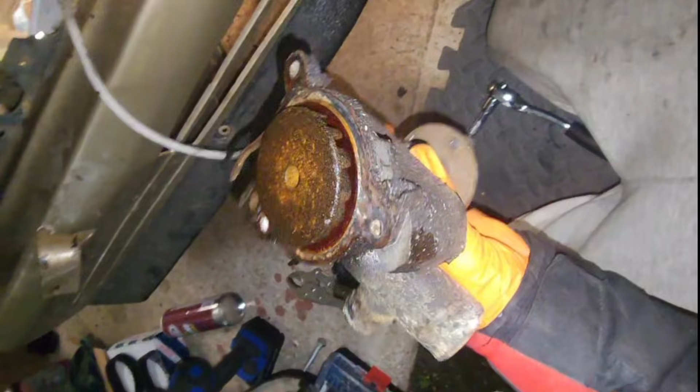That's why we should never pour water into our coolant tank. So this is our water pump, and this is the outer cylinder walls. This is where the coolant would flow through.

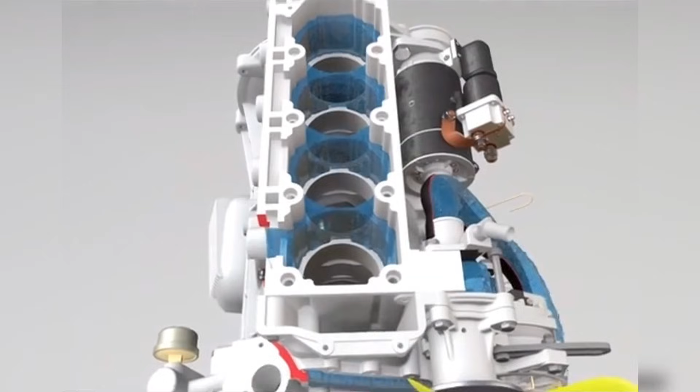Just look at it. Let me explain what I showed you in a bit more detail. So we're going to show the coolant flow journey. So we pour coolant into our radiator. It's going to make it up. This is our water pump. Then this is going to fill the cylinder cooling jacket. So you've coolant going all around the outer cylinders to keep it cool. And this is where we're seeing a lot of rust water and contamination, as well as the water pump.

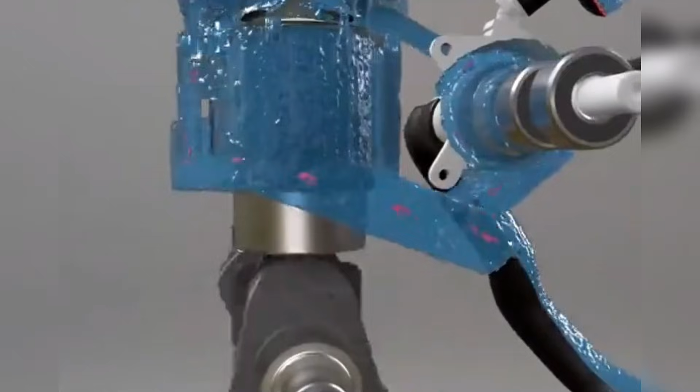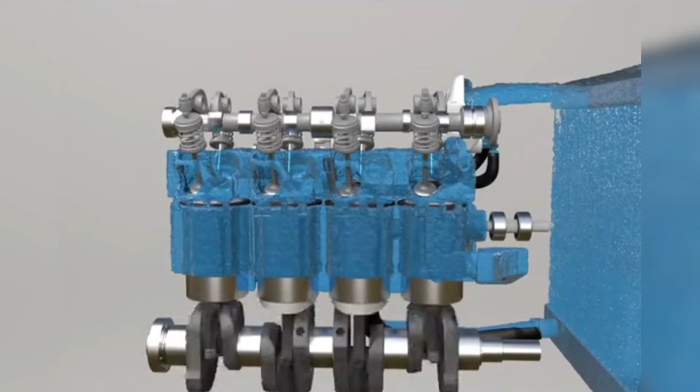So using tap water instead of proper coolant in a car's coolant system causes so many problems, like rust and corrosion. So tap water has minerals in it. The minerals rust the inside of the engine, radiator, water pump and heater core. Rust flakes can clog up passages and reduce cooling. Overheating: coolant has special additives that help it absorb heat better and prevent boiling. Plain water boils sooner, especially in hot weather, which can lead to overheating.

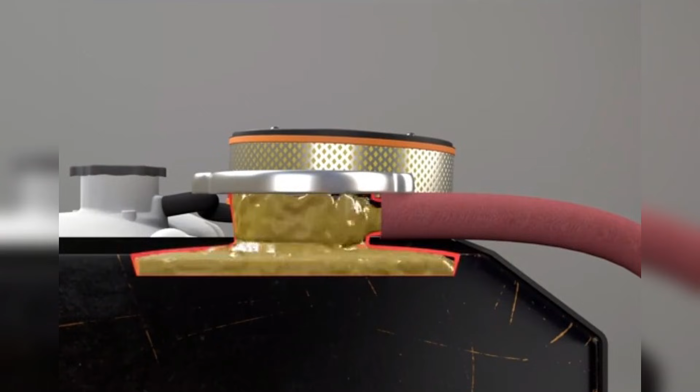Freezing damage: water freezes at 0 degrees Celsius, so coolant lowers that freezing point by a lot. If water freezes in the engine during winter, it can crack the engine block or radiator. Limescale buildup: tap water leaves behind limescale, like what you see in your kettle or shower head. The buildup reduces flow inside the coolant system and makes the coolant less effective.

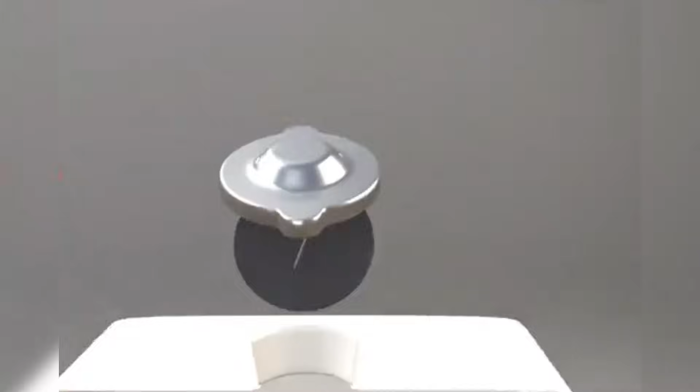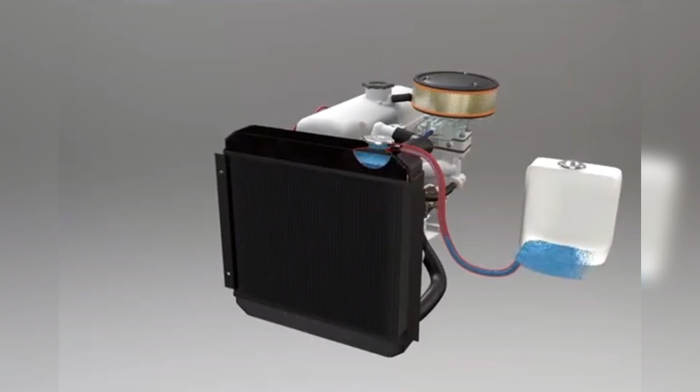It also shortens the lifespan of parts like the water pump, thermostat and radiator, which will wear out faster when coolant isn't used because they rely on the coolant's lubrication and anti-corrosive additives. So let's start from the top and get this sorted. So we're gonna do the timing belt, camshaft seals and water pump and flush all that bad stuff out of it in this video. So here we're looking at the front of the engine.

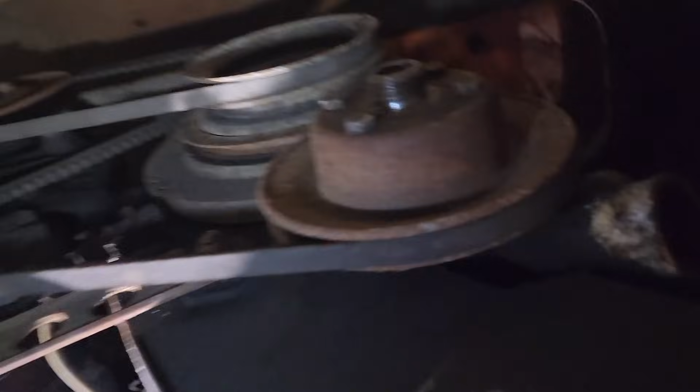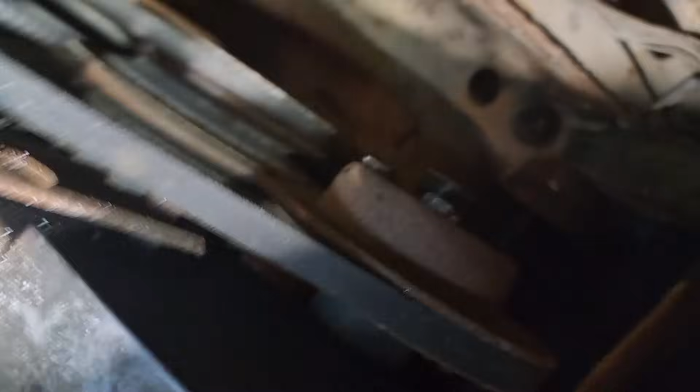We can see that's the crank bolt, which is going to be the toughest bolt to remove. I think it's 350 Newton meters. We have two auxiliary belts running our power steering and running our alternator. So we can see there we need to loosen the tensioner bracket on the alternator. So that will give us a bit of slack to pop off these belts. Our clutch fan was attached to our water pump pulley, which we removed in the last video. So once we get those belts and pulleys off, we can remove the timing belt covers, which will reveal the timing belt then.

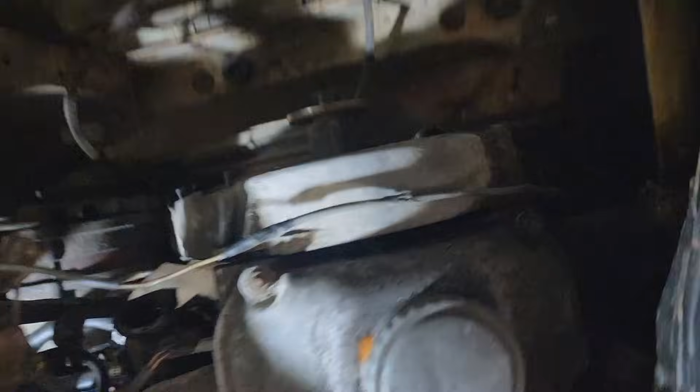Okay, so now we've removed the water pump pulley, which was just 4 bolts on the front. We're unbolting the timing belt cover here. There was a bolt here as well for it. This is our water pump that you can see here, which we just removed the pulley from. So this bracket here is the tensioner for our alternator that we just pulled off. This is a look at the front of the engine now with the timing covers off.

So you'll have timing marks on the cam sprocket up here. It's going to be hard to see, but there's a little arrow there going to a line that's notched into the block. Trying to focus on it, and here we go. I don't know if you can see that, but I'll circle it so you can get a better picture of it. And there should be marks for the crankshaft then as well that you can see here. I'll circle it as well just to make it more obvious, but you want to rotate the engine to top dead center on cylinder 1 before trying to remove the timing belt.

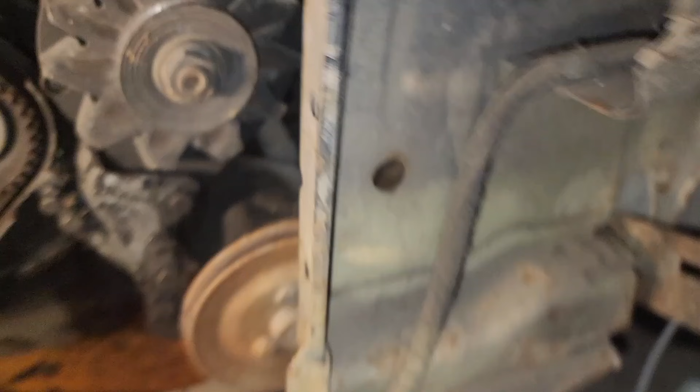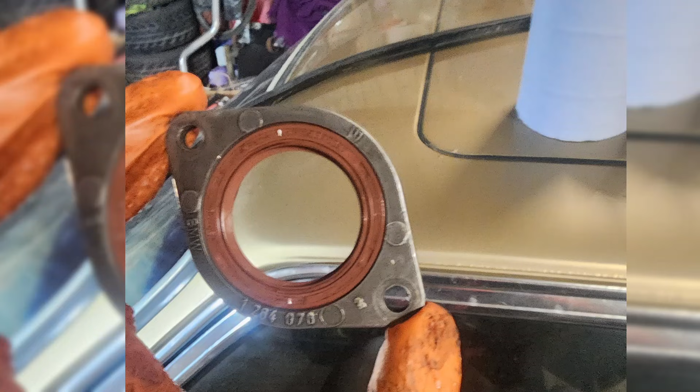Okay, so we removed the timing belt tensioner and cam sprocket, and if you're wondering why my engine is covered in oil at the front, it's because this camshaft seal is leaking, so we're going to be replacing that as well with a brand new one. So here's our new camshaft seal. It's another view of it. This is the old camshaft seal removed, so this is us going to be putting the new one on.

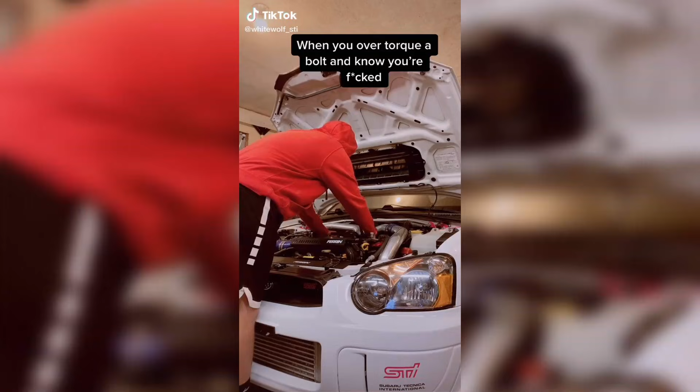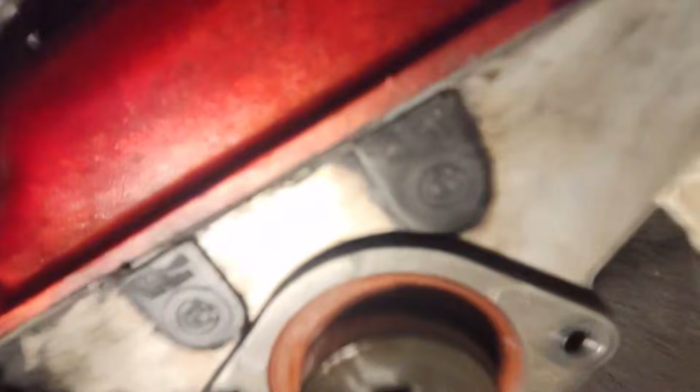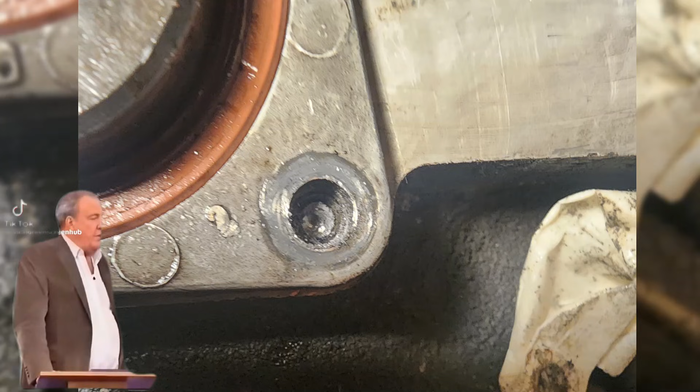Now all we have to do is torque it to a safe spec. Should be easy, should be straightforward. What could go wrong, right? I turned an hour job into an all-night job. So here's the snapped bolt in the cylinder head. How, in the name of all that's holy, did you do that? Yeah, so this is the snapped bolt, just over-torqued it, so we're going to have to try get it out and we'll get a new bolt to go into it. It's going to be a long night.

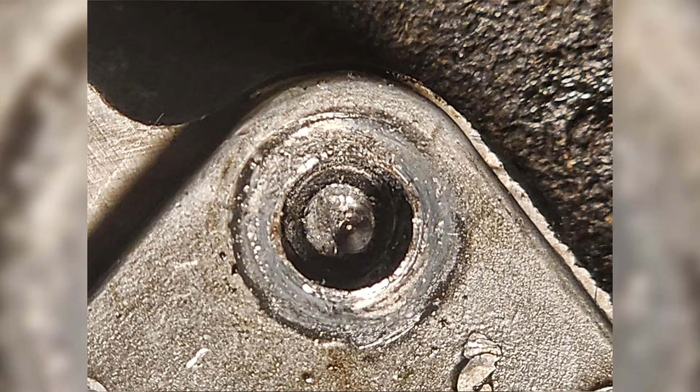So what I'm going to try to do now is drill it out, leave the head on the block, leave the block in the car. Don't want to be taking that out. Let's hope we can get it out without damaging threads.

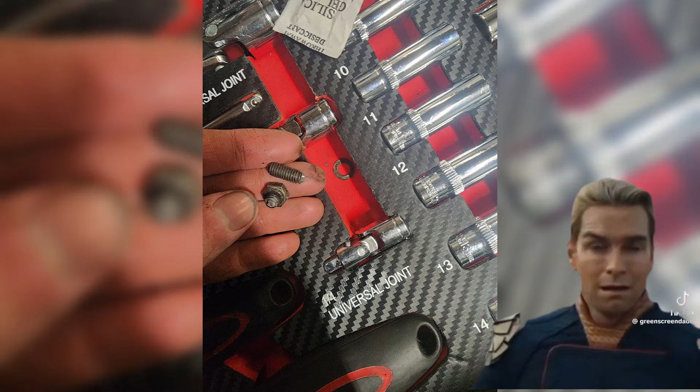So we got it out, new bolt in, torqued to spec. So now let's get back to putting the timing belt back together. This is the timing belt tensioner pin. It's looking very worn, but it does clean up very well. However, we still just bought a new one anyway.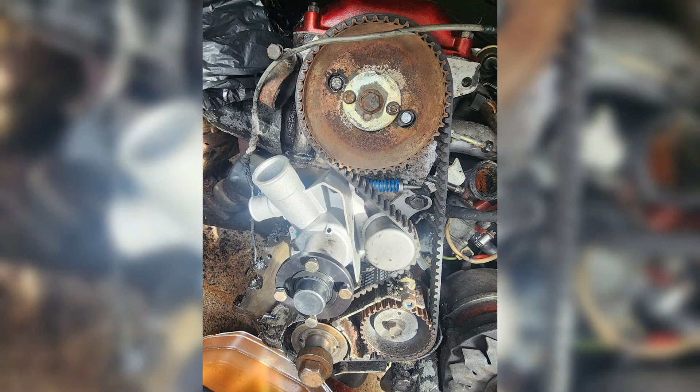So we have our new belt on. We're just making sure the timing marks line up before we set the tension on it. It's all looking fairly in order. So I just make sure there's good tension on the belt now. We have our new spring tensioner in that you can see here, and we have our new water pump installed now as well, and our camshaft seal. So we're starting to put it back together now.

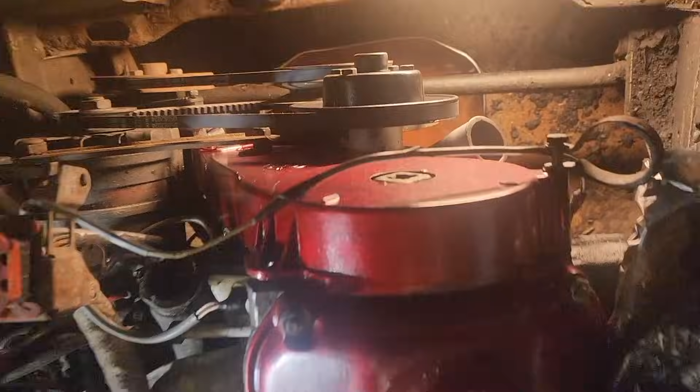So now we want to get everything cleaned up and painted. So this is the coat 1 for the cam cover being painted, and this is it back on the car. So we've got new auxiliary belts as well. Everything is painted, torqued to spec, good tension. Just need to clean up the alternator and power steering pump. We need to torque the crank bolt to 350 Newton meters. Here's a look at it from the front of the engine, all finished, except we're not actually finished.

So if we go back here for a second, we have set the timing for the crankshaft and the camshaft so that the valves will not ram into the pistons, but we did not set the ignition timing. And what I thought was a gear that runs the fuel pump is actually a gear that runs the fuel pump, but also behind that it runs a worm gear that runs the distributor, so that controls spark timing. So with that not aligned as well, we're going to be out of timing, which means the engine won't run or will run very rough.

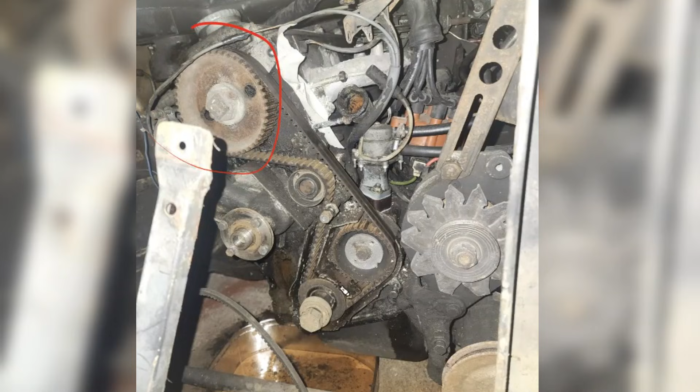Let's explain the timing here. This is our camshaft gear, okay? This is our crankshaft gear. Our camshaft has to be in time with our crankshaft, otherwise pistons mash into the valves. This is our water pump. This is our tensioner pulley. This puts tension on the actual timing belt to make sure it doesn't jump.

This gear here runs our mechanical fuel pump, which I thought was all it did, which means it doesn't matter what degree that gear is at in relation to the camshaft or the crankshaft. But it's actually also running our distributor, which controls our spark timing, which means if this gear is out of whack, then it's going to spark at the wrong time and the engine is either not going to run or it's going to run really rough.

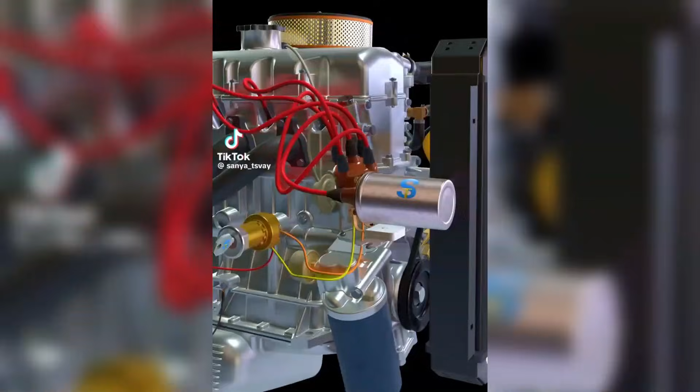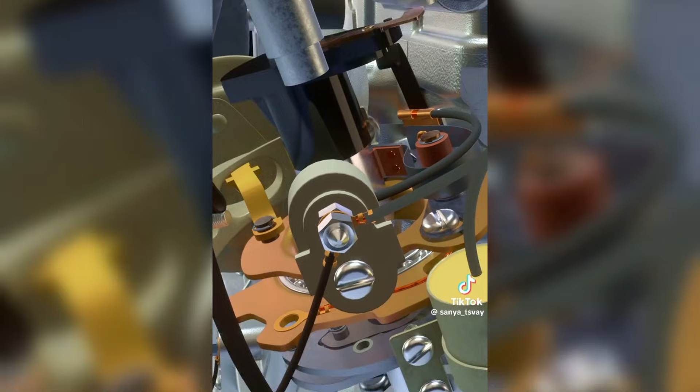Let's just explain the distributor's job and where the spark comes from. Your battery only produces 12 volts, which isn't enough for a spark plug. So your ignition coil is a high voltage transformer that steps up the volts from 12 volts to tens of thousands of volts. Then that sends it to your distributor's pin, that rotates around and then delivers spark each time it rotates to each different spark plug. Here's a look of the distributor cap off, so we need to unbolt this, move it, and now we can see we have it lined up, so now our ignition is in time as well.

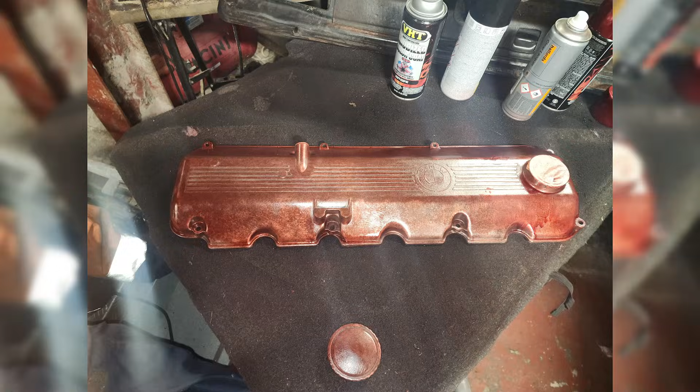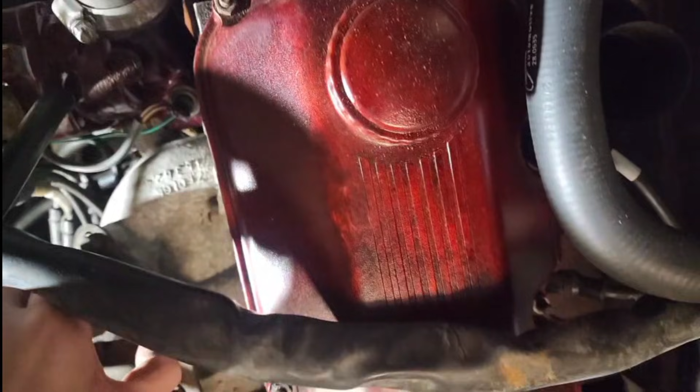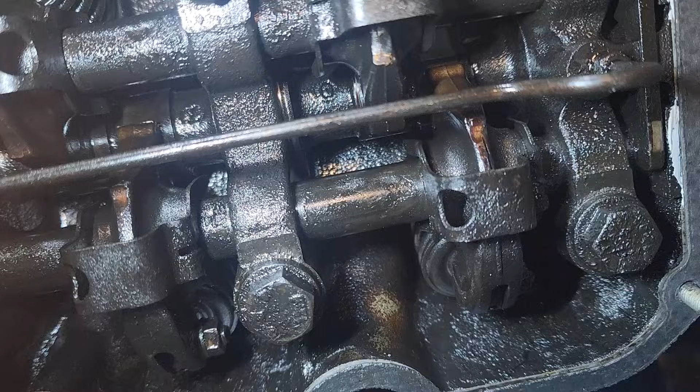Took the valve cover off, then cleaned it up, hit it with some high temp paint. I'm going to show you in the next clip the top end ticking, so we need to set the valve adjustment as well. So on most modern engines you wouldn't have to set the valve adjustment. A lot of engines use hydraulic lifters and they use engine oil pressure to automatically maintain a zero valve clearance.

Then a lot of JDM engines like Toyota, Honda, and some European double overhead cam engines use shims, so a thin metal shim that sets the valve clearance, but to adjust them you have to swap out the shims for a thicker or thinner one, and this would involve removing the camshafts, which is a bit of a pain.

So the M20 engine we're working on here uses eccentric adjusters, so each rocker arm has a small eccentric, an off-center disc with a small screw, and rotating the eccentric moves the rocker slightly, increasing or decreasing the valve clearance, and then you lock the eccentric with the nut once the gap is correct. So the gap that needs to be set for this engine is 0.25 millimeters.

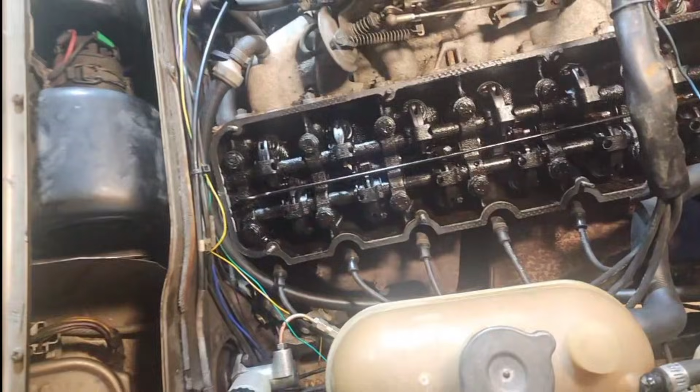So the nice thing about this is they are super easy to adjust. There's no need to buy shims. It can be done at home with some basic tools. All we need is a feeler gauge. These need to be adjusted every 10 to 15,000 kilometers or they get noisy. Another thing we noticed with the rocker cover off on this engine is it could have done with more oil changes throughout its life. So a couple of things we're doing to fix that.

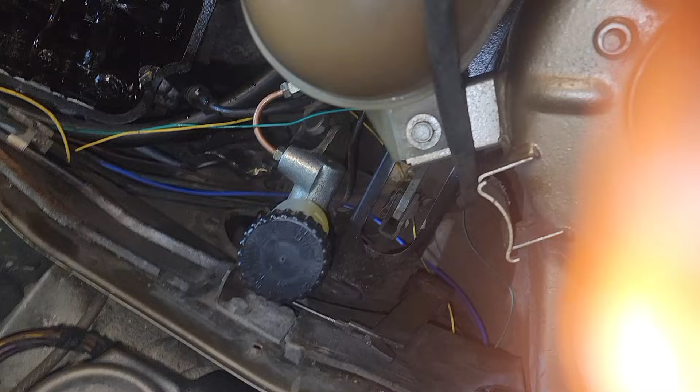So we have an oil spray bar, that's what's going across the top here, and that's supposed to spray oil onto the cam lobes and rockers, keeping them well lubricated. And if you don't replace your oil at short intervals, the oil begins to get thick and a bit sludgy, and it's not going to spray through those oil bars, so you're not going to get the proper lubrication on the head. So we've cleaned all that out. You can see that the oil is spraying now nicely, and the tick has also gone out of the top end.

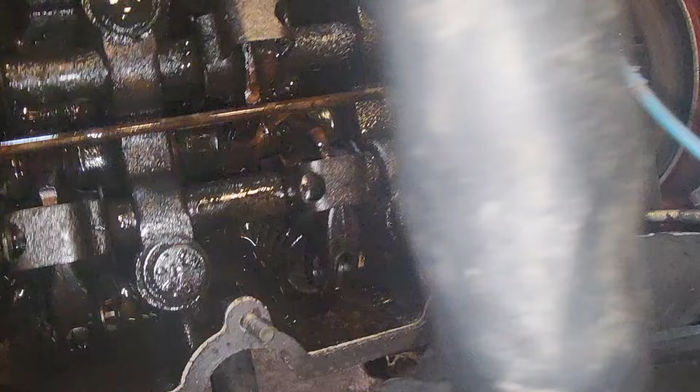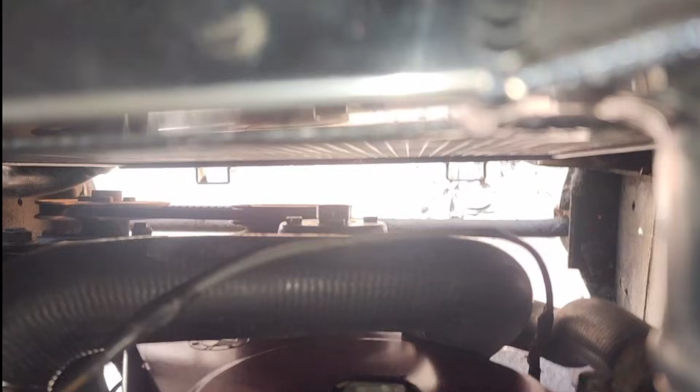So this is the rocker cover back on then, with a new gasket, all painted up and looking well. Here's a quick video of it. So with the rocker cover, we have the timing belt covers. You can see the water pump is on. That's before the pulleys were on. Just to show you how little room we had with the new thicker radiator in. So yeah, the stock fan was never going to go back on, and we were never going to be able to put a pull fan on it, so we needed to put it on the other side of the radiator to push air.